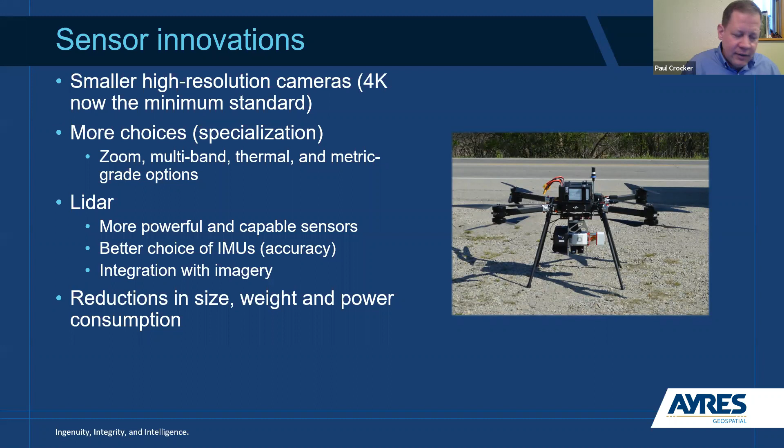Generally, whether you're talking about imagery or LiDAR, you can look at this as a capability gradient. So on the lower end, this is something like you could buy at Best Buy. You could get a DJI Mavic drone, and you can get some decent imagery and video from something like that. From a survey standpoint, they're relatively limited because they have lower accuracy. It's not a metric grade camera.

You can move up in level to a higher grade camera or LiDAR sensor that allows you to get what we call mapping or asset grade. So this would be something you could put into a GIS that would be a good relative accuracy for planning on a site level, but it's not something you could design from at an engineering level.

It's not survey grade. You go a step higher and you get to a survey grade sensor where you can get, for example, with an elevation on a LiDAR point cloud plus or minus 2 centimeters, sometimes even better than that. You could get even further with a LiDAR terrestrial scanner. So like a survey total station that's on site that's scanning for several minutes in one place from a known XYZ location, that would be even a little further on this gradient.

So in the UAS world, I'm not aware of any sensor that can quite touch a terrestrial scanner. So you could put that on the upper level of this, but the downside of terrestrial scanners is they can't cover a big area. You set them up on a point and they scan, and you got to pack it up, move it to another point, scan, and so on. So the advantage of UAS, if you can get by with that level of accuracy, is you can scan a fairly large site in a short amount of time and gather a ton of data.

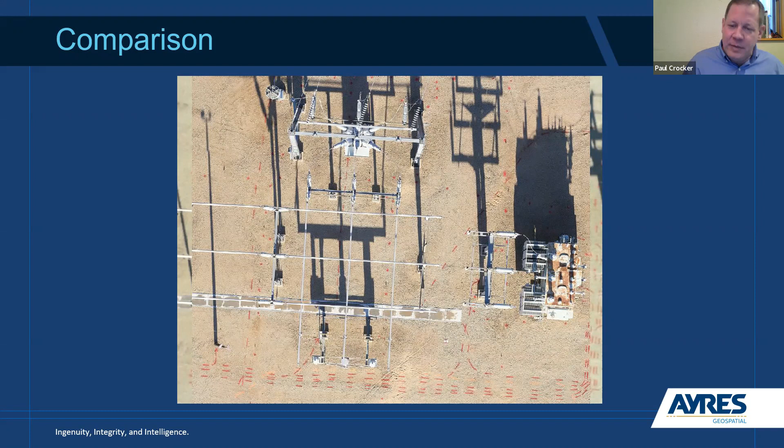Just in comparison, this is a traditional DJI drone compared to a metric camera, and we're not even anywhere near zoomed in on this right here. So big difference in quality, much higher quality lens, so you're going to be able to get accurate measurements from this as well if you pair that up with an IMU.

On the LiDAR side, you're talking maybe a 40-pound drone that flies for a half an hour. If you tie this to a hybrid drone, gas electric drone, you can keep it in the air for an hour to an hour and a half. So, a decent platform for getting colorized point clouds for engineering design, electrical utility infrastructure, watershed analysis, and so on. I'll show you some examples of this.

A thing to point out too, when we're talking high resolution imagery for mosaics, for LiDAR, there's still survey required with that. You need set control to be able to tie things into XYZ space. So it's still a survey project. So just a quick video showing the metric camera in flight right there. So it's pretty decent size. This isn't a little one that you're going to fit in a backpack.

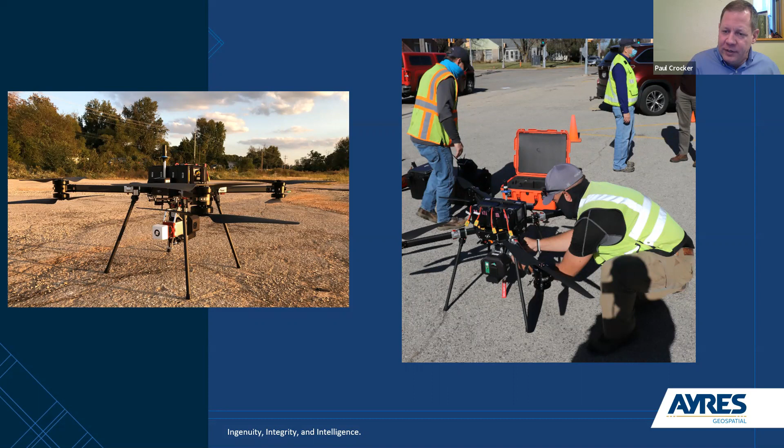So depending on the project, we often have a crew of people out there working on these, operating, especially in an urban environment, as a visual observer. So I'll give you an example of the scale of our LiDAR drone right there being set up.

So common misconceptions about UAS, what it doesn't do. It does a lot of great things, but what it doesn't do is replace the need for a surveyor boots on the ground to help with your engineering project. It supplements your survey data. It's not the final thing that you're going to have. You can't run and gun with it. It takes some planning if you want to get good data, and you do need a set control.

The post-processing of this data is just as important as collecting it. So after you've collected data, whether it's imagery or LiDAR, it takes skilled folks on the back end to get the most out of it and ensure that you're getting accurate data to support your project. So the principles and science behind the LiDAR and imagery, these all remain the same as they do with traditional methods of acquisition. The only difference here is we're changing how we get it using a drone.

So things that go into planning a project, where is it? How big is it? What are we trying to capture? How are we going to set control? How are we going to fly it? All those things need to be known and determined if you're going to decide is UAS the right tool for the project.

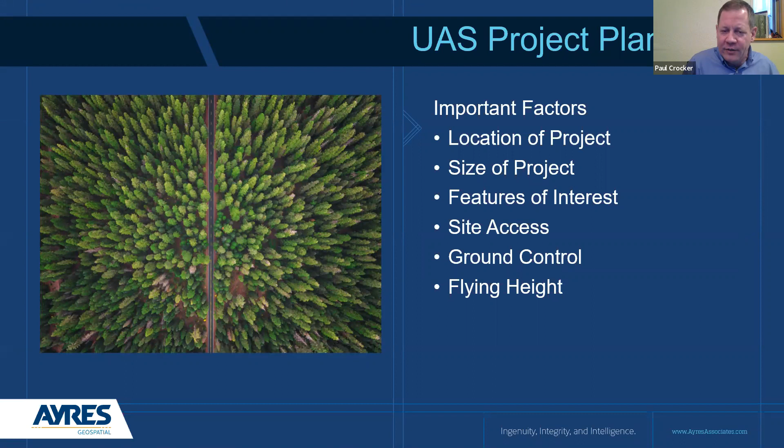There are constraints for using UAS, bad weather. Obviously, you can't collect good data if you have rain or snow. Gusty winds can impact your flight. You want a stable platform. So we can fly in pretty decent winds, but there's a limit to that. If you're doing imagery for an elevation surface, a topo surface, or even LiDAR in some cases, vegetation can be impenetrable and you need to go in there and boots on the ground survey.

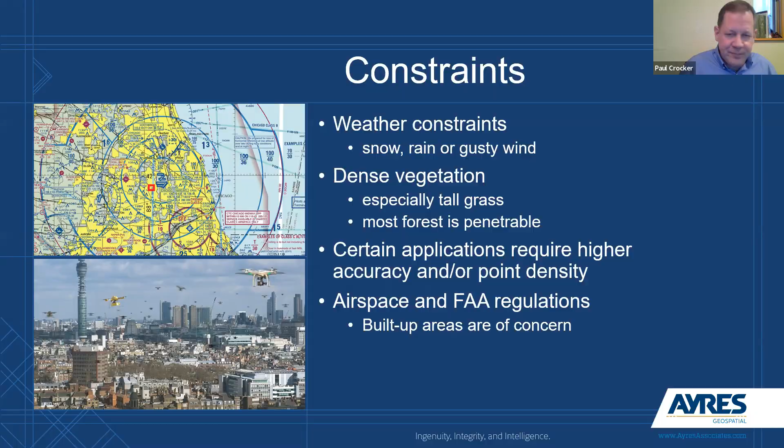Certain applications may require high accuracy or point density than we can accomplish with the UAS platform. So I mentioned the need to sometimes use a terrestrial scanner. Also, the regulations that we talked about are things that we have to work within. Give you an example, that is airspace. So this is the Madison area right here. And this shows you the airspace map for Dane County Regional Airport.

So the FAA has designated boxes around the airport with a maximum altitude in which you can fly the UAS and get automated authorization. So we can go into an app, plug in where we're going to fly, and if we're in any of these boxes that allow us to fly up to that height, we're good to go. If you want to fly near the airport where you have a 0-foot box, or you want to fly at a couple 100 feet at one of these lower altitude boxes, you need to go in and get a manual authorization, which can take some time. You have to submit a plan to the FAA and have that approved. But it can be done.

So this project right here is a site that we applied for authorization. It's Chicago O'Hare, you see in the north part of the image, the upper part of the image. So less than a half mile from the runways of Chicago O'Hare, in a 0-foot box, we were able to get airspace authorization to fly at 200 feet. So it can be done, and you get your waiver within a certain time frame, and you're allowed to fly your project. So there's planning involved.

So what we typically do is start with our deliverables. What are we trying to get for our project, and determine, can we acquire that? What's the best way of acquiring that? Is it boots on the ground survey? Is it UAS, or are there other platforms we should be using? Can we achieve the accuracy requirements that the engineers need? Do we have the ability to fly it? Do we have the skill to fly it?

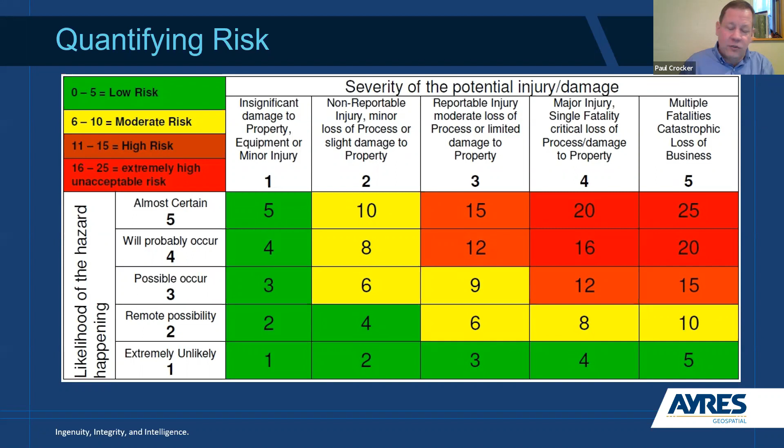So we use a process here where we quantify that risk based on likelihood versus severity, and we take steps to mitigate that risk. So if we have an area where we have difficulty maintaining visual line of sight, for example, we will often use a lift to get a visual observer up in the air a little bit higher where they can maintain sight on the drone to keep safe visual line of sight on it.

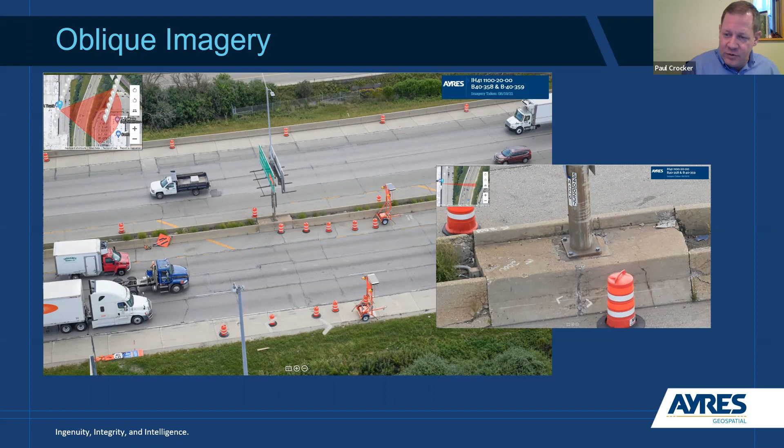Then we use software to automate a lot of our flight planning. And that's going to be dictated based on what are we trying to do? Are we getting imagery, in this case high resolution inspection imagery on a highway, or are we flying LiDAR? LiDAR is very precise. There's precise maneuvers you need to plan on it. We're looking at correcting for altitude, and that would be a different flight profile than imagery.

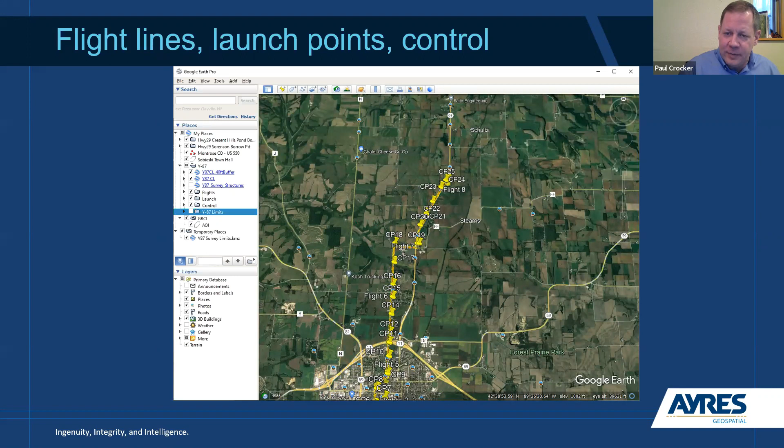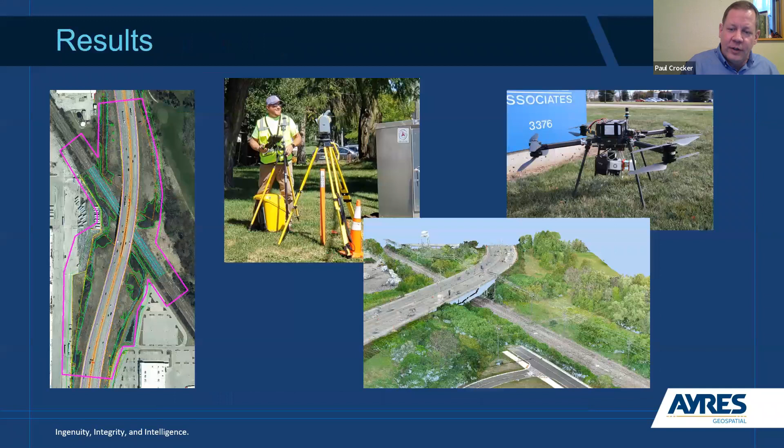We want to set control on a project to make sure we can tie that into XYZ space and get good, accurate data. So these would be targets that we're going to put out on the ground that we can use in post-processing. And the results that you get from this are some great data sets. So now that we have a background of how UAS fits into all this, I'll show you some examples.

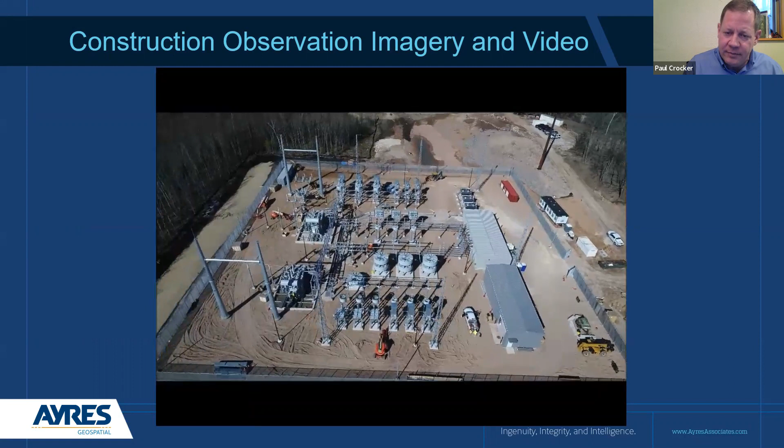So this was some image documentation of a substation that was built. More utilities infrastructure. This right here is where we had a video recording of, wait for it, there it goes. They detonated this area in a quarry right next to some high voltage lines. So they wanted to document whether or not anything was striking that utility corridor.

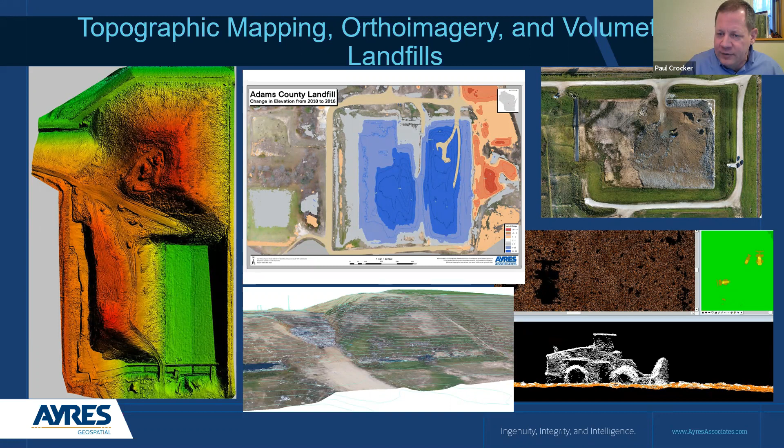So if we have bare ground, we can use a low cost method to fly an image based sensor over it and use photogrammetry methods, aerial triangulation, to pinpoint the XYZ position of any point in the image and project a 3D surface. And from that, we calculate volumes to a fairly high accurate level compared to having a surveyor out there walking on these piles, measuring points and then interpolating a surface. So we use this quite commonly on things like gravel pits and sand mines and in quarries.

We have a large project starting in North Carolina this week where it's a mega site where they're building a large battery plant for Toyota. And they're clearing several hundred acres and they want to monitor on a weekly basis how much material is being moved around on the surface. And we're doing that using this method right here.

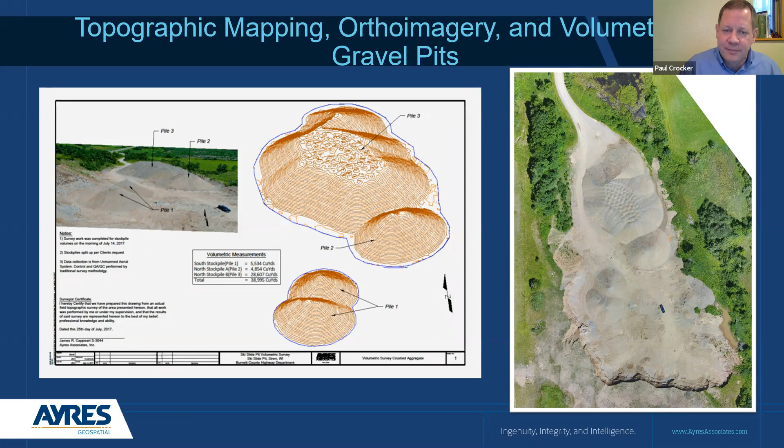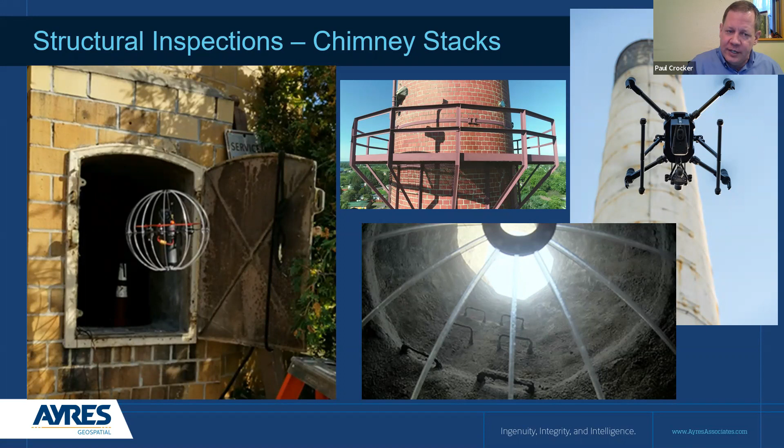So that was sand mines. We also do structural inspections with cameras. This is the example right here, the chimney stack inspections. So the drone that you see on the left there, it's a cage drone inside of a ball that's flown manually without GPS that captures video throughout the inspection. So you could also use that in any kind of a confined space.

So getting to the ones that are probably more relevant to folks in this meeting, using high resolution imagery to document reconstruction on a highway overpass in Milwaukee. So we're able to safely do this from a couple hundred feet away. So we're avoiding traffic. We don't have surveyors down in traffic trying to monitor and document this stuff. So we're able to get it at a safe distance.

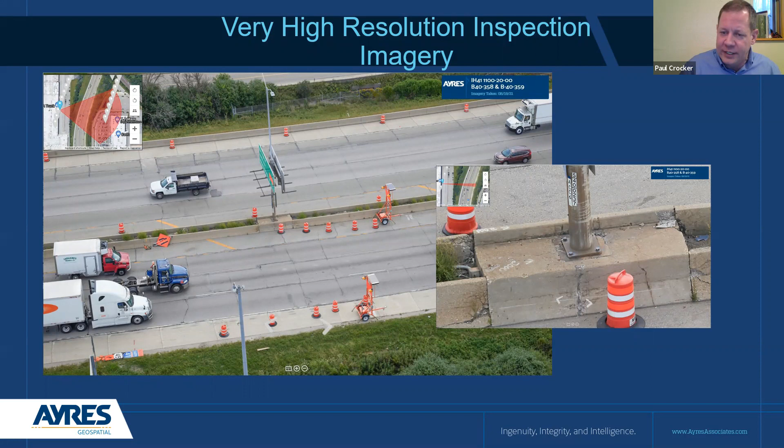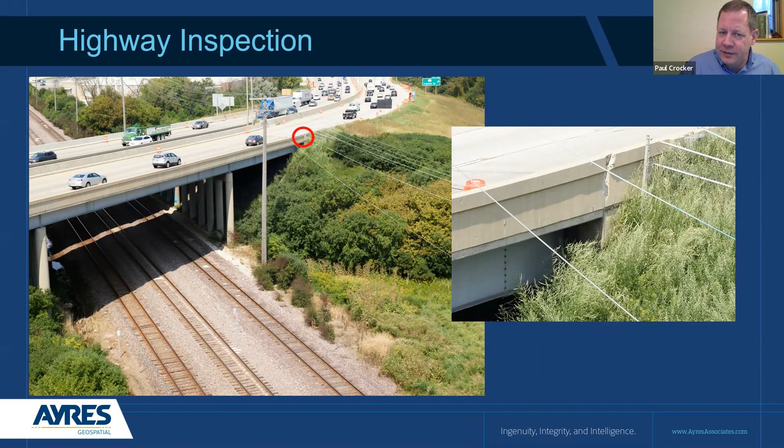So you can see it's documenting the spalling and the cracking and the barriers inside the highway. This is another angle of it from the side. So this would be up high where it's difficult to access. And again, we're doing this at a safe distance.

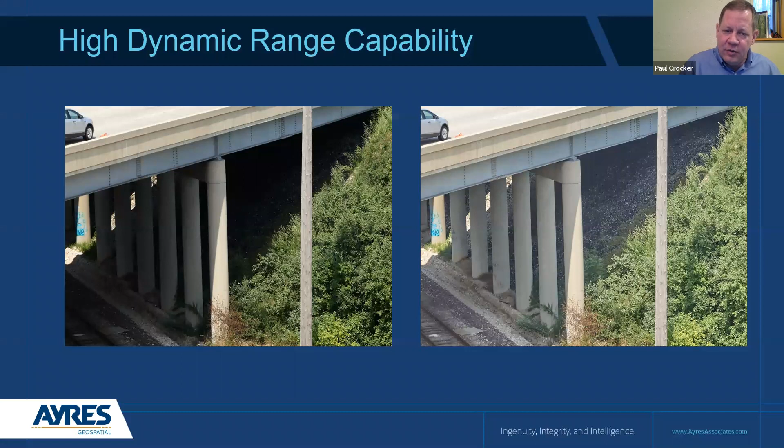We can get 3D panoramas, so kind of like what you have with Google Street View, but we can do it up in the air. The LiDAR sensor that we use has two cameras along with the LiDAR sensor, so we have the ability to colorize a point cloud. So each point gets a value from the cameras in an RGB space, which also allows us to create an orthomosaic at the same time.

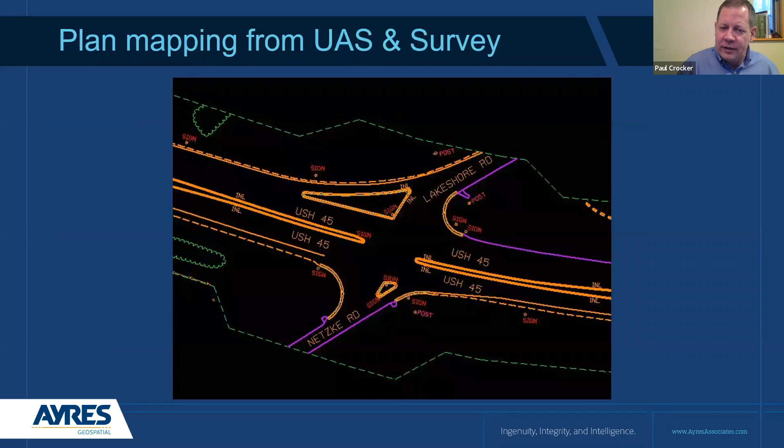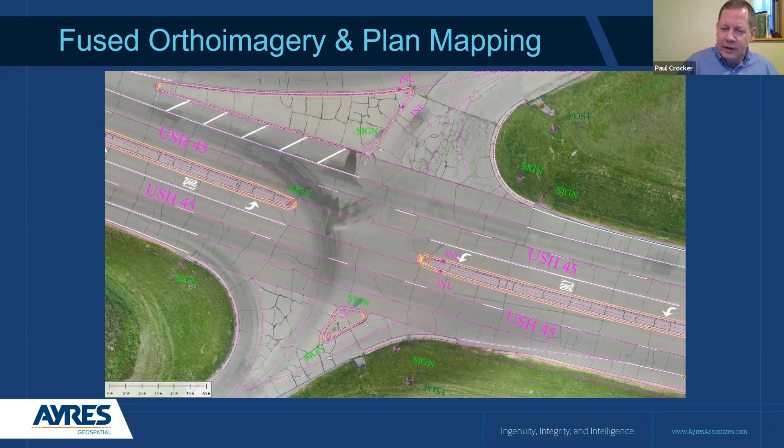So we can collect planimetrics from that data as well as a point cloud. So in this case, we're taking the ortho imagery and the planimetric data that was created from it. So we collect all this in a single flight rather than having to bring multiple aircraft and do this with multiple sensors.

With LiDAR, the sensor that we're using can get you about 2 centimeters or better on hard surfaces. Oftentimes we're able to get 1 centimeter or better. This supports 1 foot contours. We can extract planimetrics from it, and it's used for site documentation and planning and design.

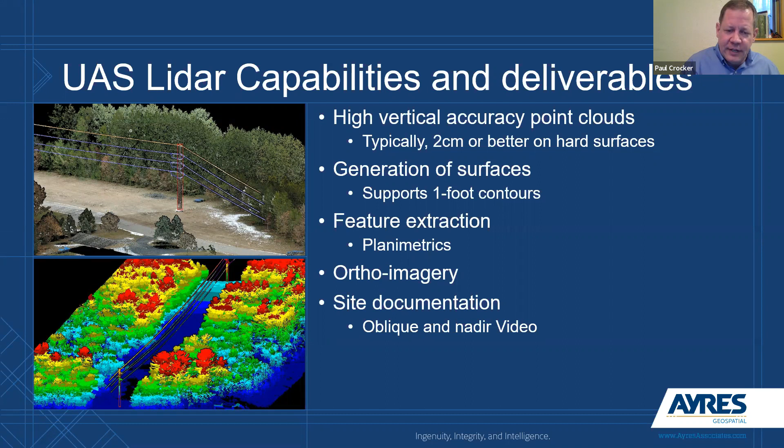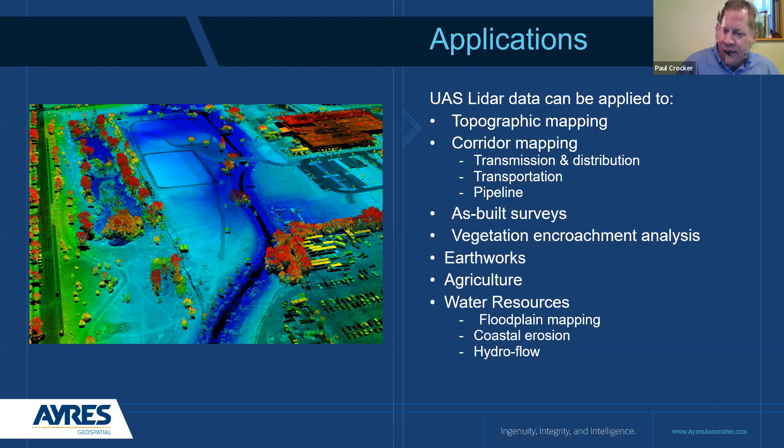It's really good for corridor mapping, highway corridors, utility corridors, pipelines, topographic mapping, where it's very time consuming and costly to send a surveyor on 10, 20 miles of corridor. We can fly the entire thing in a day and then pull the data out afterwards. So things like vegetation encroachment, earthworks, agriculture, water resources, all these things can be done with this platform.

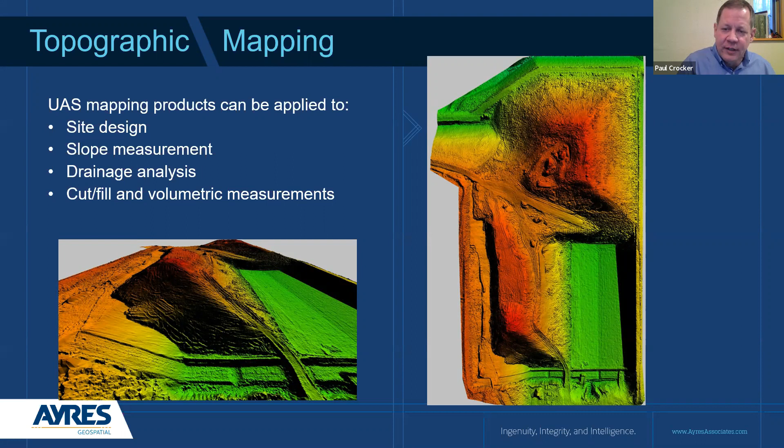So similar to the example I gave you with imagery, this can use LiDAR for it. The benefit here is we can penetrate a lot of vegetation and still get a good surface. So as long as light can penetrate it, we're going to see the bottom. So earthworks, like we were doing with the imagery-based sensors, we can get much more accurate surfaces using this technique compared to the imagery-based.

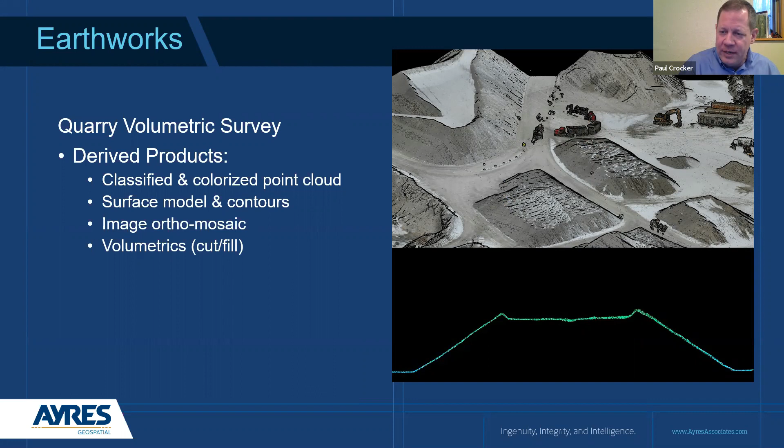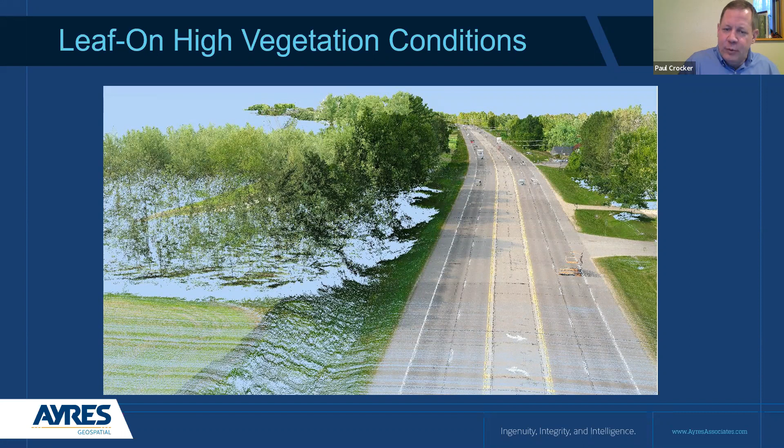There are limitations though with vegetation. This was done in the summertime. And because we're only interested in the highway corridor, that was okay. But you can see off to the sides where it's blue, we weren't getting point coverage down to the ground. So if you needed that, you'd fly this leaf off.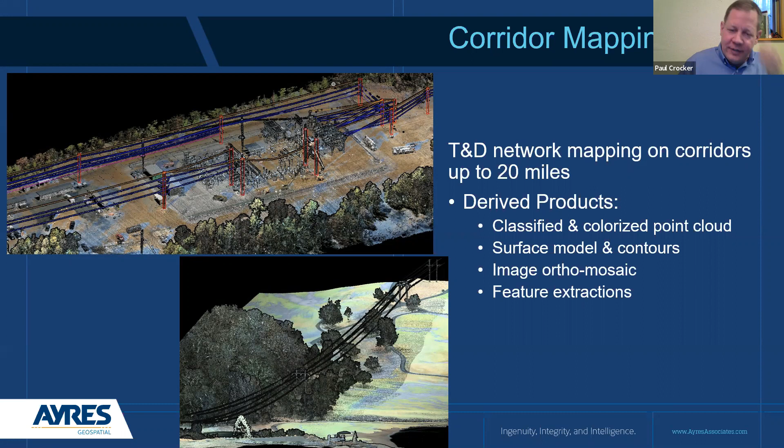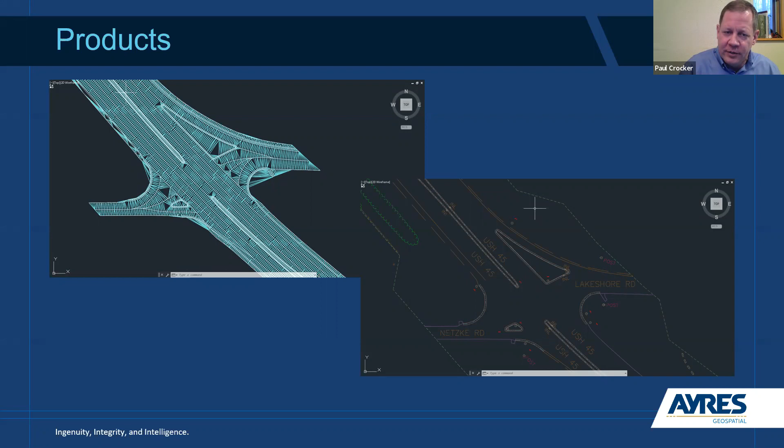So from a transportation and design standpoint, this is a 3D surface that was created from a LiDAR point cloud that gives you 1 to 50 planimetrics and the necessary topographic profile to cover, I think this was a 9-mile highway corridor, Highway 45. And that's used to do the final design on changing intersections, some of the other features that our civil engineers wanted to plan into the rebuild of this road.

Another example of a project was a Highway 41 overpass project that we did, where we flew a couple of overpasses where they wanted to replace that overpass. And in this case, it's also running over a railroad crossing. So it's a high volume of traffic, and there's a lot going on this site where it was hazardous to surveyors on the ground in many locations.

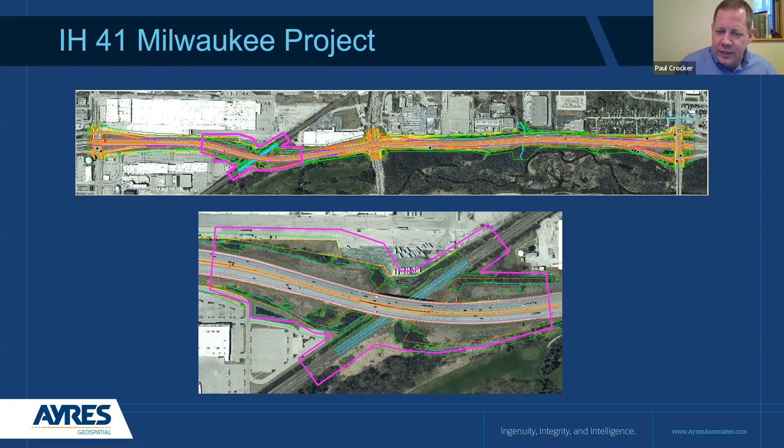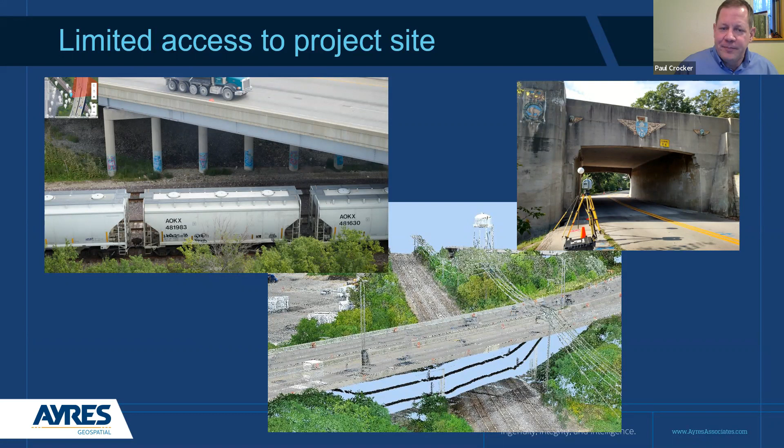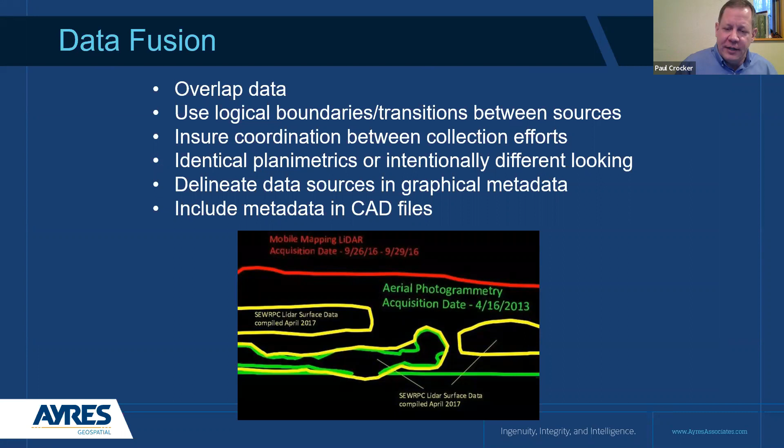So high volume traffic, you're not going to shut down lanes on something like that unless you absolutely have to. And we're fusing many different types of data together on a project like that. There's also agricultural projects where we fly with very high point densities to understand the structure and the growth and yield of different, this is some vineyards or some lemon orchards in California.

A quarry in Chicago. So this is a very hazardous site, 300 feet deep, where it's just about impossible to survey it on foot, whereas a drone handled it very easily in an afternoon. Another site I'd like to highlight is this slope stabilization that we flew in California. There's a wildfire that went through, and then subsequently had a lot of landslides due to erosion. Lost the tree cover on it.

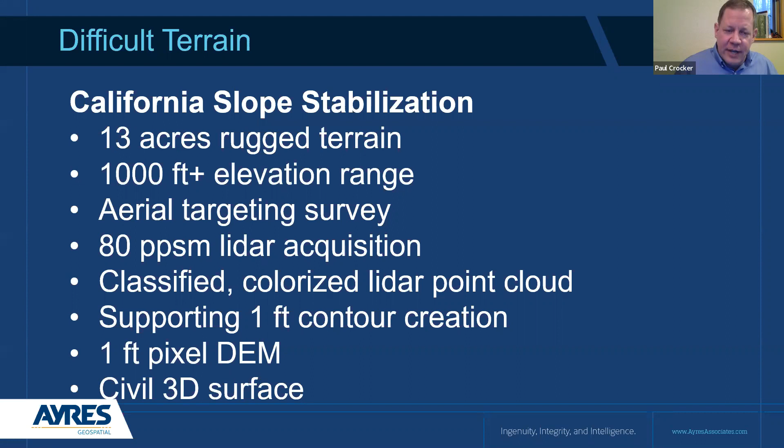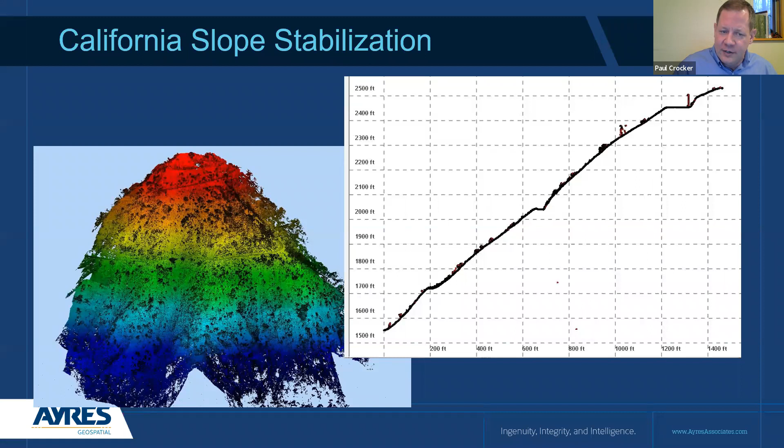The range from the top of the site to the bottom is over 1,000 feet. But by using LiDAR on it and just a couple of flights, we're able to, you can see the slope now would have been hazardous to survey on foot. Shows you the gradient in the profile right there. We're able to give the designers a very accurate profile from which they can design their erosion control measures in reconstructing the road that transects that site.

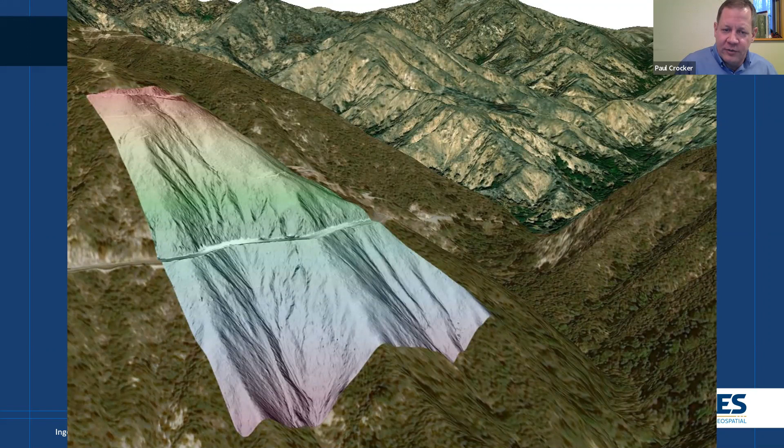So the image on the right looks like a photo. That's the point cloud itself. There it is again, the surface superimposed on the imagery. So that would have been, I don't know how you'd have done that with traditional survey. UAS is pretty much the only way you're going to do it. So very hazardous site, best tool for the job. So we could do that on a lot of different sites like that. This is a good tool.

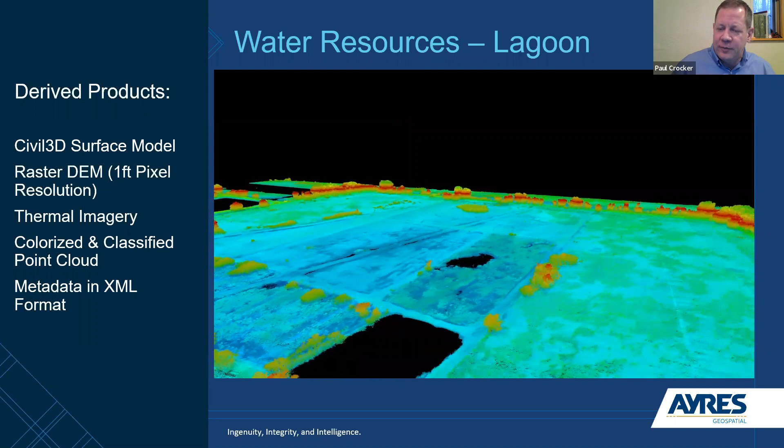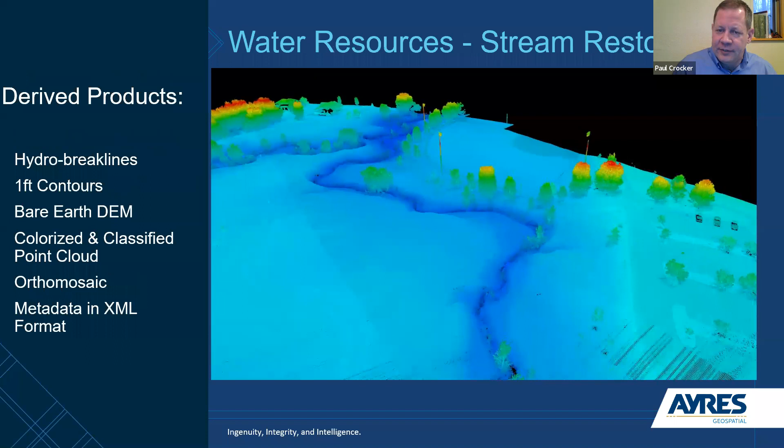Water resources. This is a site in Madison that was flown with some former sewage lagoons that were converted into a wetlands area. So we're mapping it to look for subsidence in the berms. Stream restoration in Colorado. So again, mapping a fairly decent sized area with UAS and a couple of flights where it would've taken a week in the field.

An area in Michigan where a dam broke and they're looking at mitigating the risk from a future design standpoint. Where do they want to put a new dam? So we mapped a 500-acre site in a day and a half, where it was just about impossible to get out there on foot.

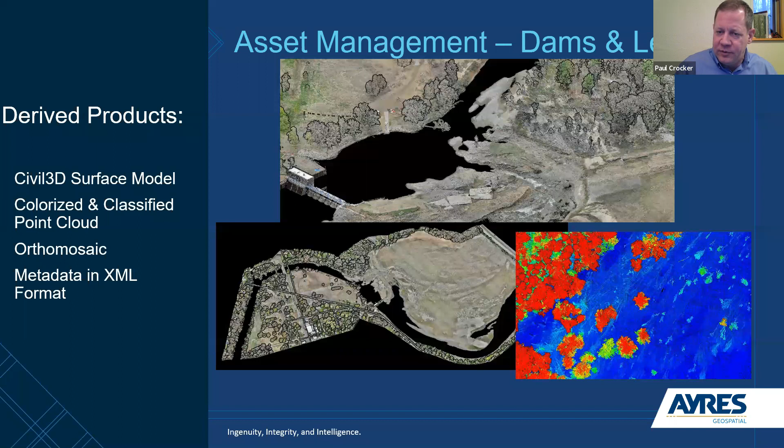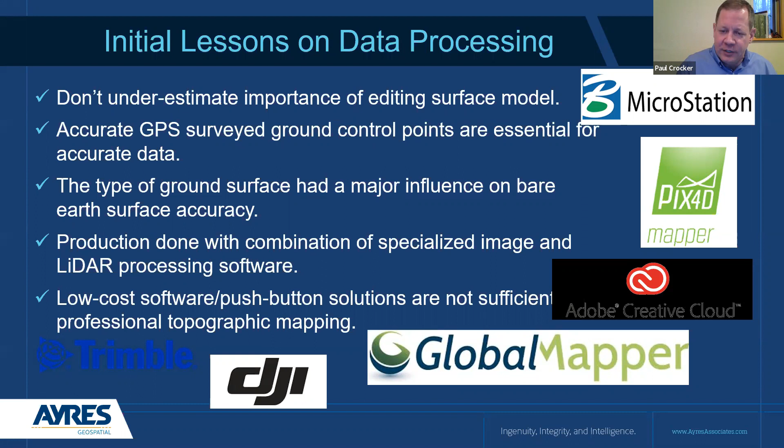So I want to save some time for questions here. So again, there's a lot of things that you need to look at when you're planning a project, but UAS is often a good solution for that. Any questions?